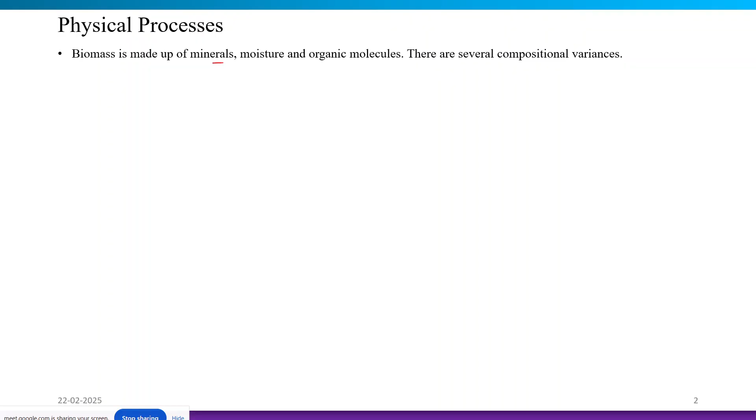So we know that biomass is made up of different kinds of minerals, moistures, and organic molecules. There are several compositional variances in the different biomass compositions. The moisture content of the terrestrial species is relatively low compared to the aquatic biomass, or you can consider the municipal biosolids and animal manures. These aquatic, municipal wastes and the animal manures have higher moisture content compared to the terrestrial biomasses.

And the woody biomass species have low ash concentrations, but certain aquatic organisms and also the agricultural crops have very high ash content. So we are discussing the moisture content and the ash content of different biomass species, because this will affect our conversion processes as well as treatment, pre-treatment processes.

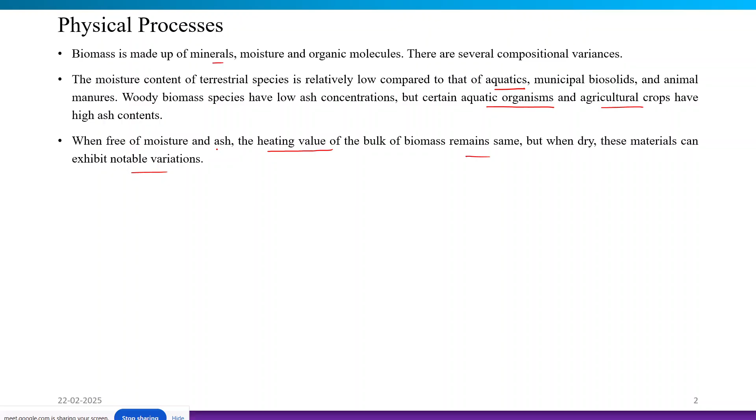So how this will impact: when free of moisture and ash, the heating value of the bulk biomass remains the same, but when it is in dry conditions, this biomass material can exhibit notable variation. That means when we decrease the moisture content and manage to decrease the ash content of the biomass, then the heating value of that biomass source as a fuel will increase.

So, when we consider the untreated municipal biosolids, they are often inappropriate for direct application in thermochemical conversion because they contain a significant quantity of moisture. Under usual circumstances, this feedstock cannot support a self-sustaining combustion process unless we do the drying or dewatering treatment to reduce the moisture content to a great extent.

Now, the physical conversion techniques are very essential for converting the raw biomass into energy-rich products in the field of biomass utilization and conversion. Two crucial processes that are frequently used to lower the moisture content of different biomass sources are, first, dewatering, followed by drying. These two treatments improve the thermal efficiency and also improve the storage stability of the biomass sources.

Thus, the enhancement of heat transmission within the biomass sources is achieved by size reduction, followed by energy densification of the biomass, such as pellet formation or briquette formation, through a compacting or densification process. Biomass processing heavily relies on separation techniques. There are different separation techniques that make it possible to isolate certain components for later use, extract important ingredients, and remove contaminants from our biomass sources.

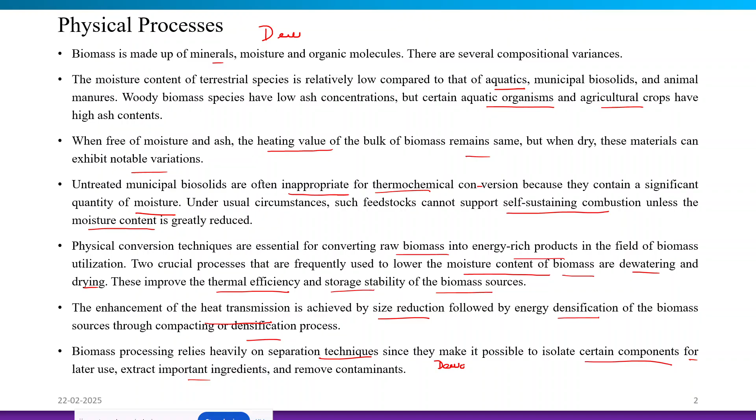So in this slide we have discussed the importance of removal of moisture and the physical processes. I'm writing here, maybe at the end. It involves dewatering, drying, size reduction, then followed by densification, and then separation. So these are the physical processes we are going to discuss in the subsequent slides.

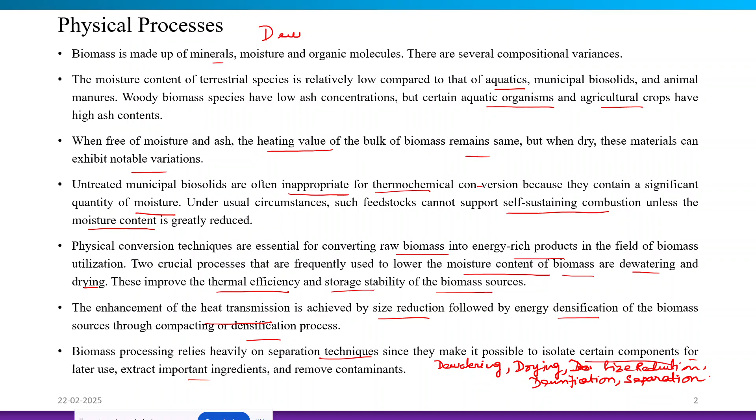First, we are going to discuss dewatering and drying. Dewatering is the process of removing completely or some of the water content from the biomass. Now we know that there are two types of water content in biomass. One is inherent water content and another one is surface water content, or the exterior water content.

Okay, so it can be essential to partly dry the raw feed material before conversion in certain situations where an unwanted material or virgin biomass is thermally treated directly for energy retrieval. Otherwise, the conversion process may use more energy than may ultimately be created in the form of energy or fuel.

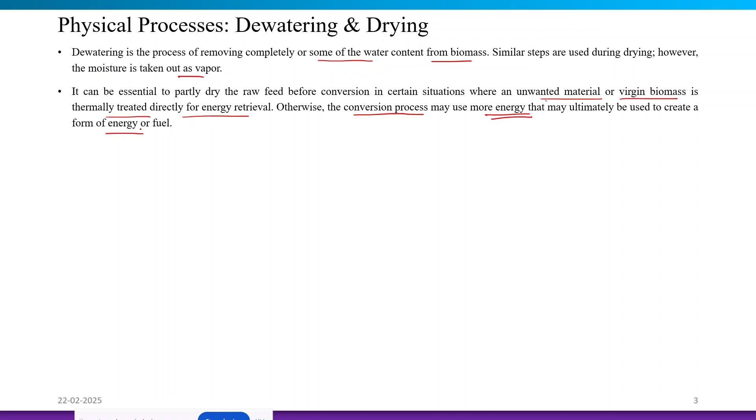The high moisture content of the biomass in its natural condition reduces the energy content and makes it difficult to manage or even to store, because if we store a high moisture biomass source in that condition, it may automatically start degrading by the presence of different organisms, right? So our storage will be damaged, the source will be damaged.

And if the moisture content is very high, then it will not be thermochemically suitable for those processes, because removing that moisture in the process of thermochemical conversion will take a lot of energy. So we are losing energy in the form of moisture removal. So it is not good practice to directly use virgin biomass in thermochemical or other conversion processes. So we are suggesting dewatering and drying treatment as a pre-treatment process of the biomass.

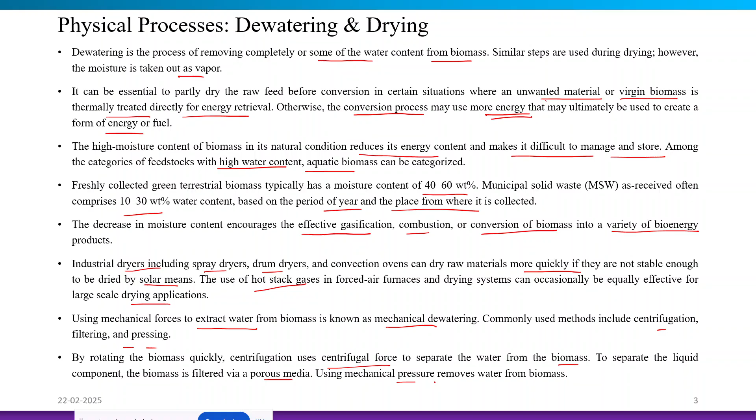Using mechanical forces to extract water from the biomass is known as mechanical dewatering. Commonly used methods include centrifugation, filtering, and pressing. These are the methods for mechanically removing water from biomass sources. By rotating the biomass quickly, centrifugation uses centrifugal force to separate the water from the biomass. To separate the liquid components, the biomass is filtered via porous media using mechanical pressure to remove the water from the biomass.

Now, thermal dewatering uses heat to help remove water from the biomass. Techniques including thermal pressing, steam explosion, and evaporation are often employed as thermal dewatering processes for biomass sources. Water is heated and turns into vapor via evaporation, which allows it to be extracted from the biomass. High pressure steam is used in the steam explosion method to break up the biomass structure, and it removes the water very easily. By subjecting the biomass to high pressure and temperature conditions, thermal pressing encourages the release of water.

Mechanical dewatering with the assistance of thermal dewatering is a relatively new method. This is the combined method of mechanical and thermal dewatering for the separation of liquids or solids in an environment friendly manner. The main concept of this combined technology is to provide high temperature in the mechanical dewatering process to improve the removal of moisture content.

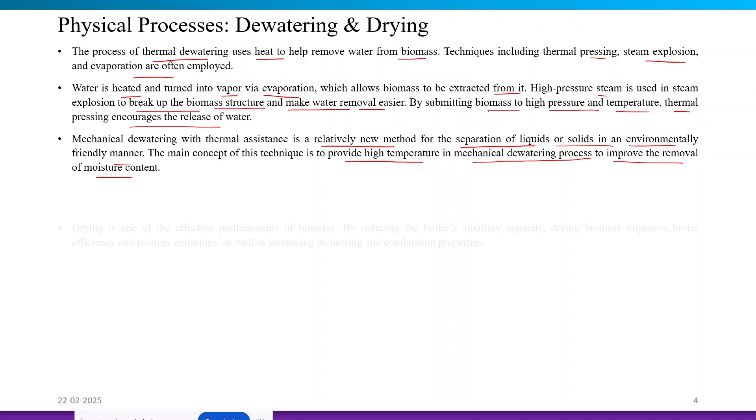After dewatering, we go for the process of drying. It is one of the effective pre-treatment processes to be considered for biomass. By reducing the boiler's auxiliary capacity, drying biomass improves boiler efficiency and reduces emissions from the boiler, as well as increasing its heating capacity and combustion properties. Biomass pre-drying could significantly reduce energy loss in the combustion process. Moreover, pre-drying results in a reduction of the required fuel flow rate for achieving the desired boiler output. Thereby, it influences fuel transportation as well as reducing the storage capacity.

We already discussed how moisture content is very crucial for the transportation and storage capacity of biomass. It is also crucial for combustion, incineration, and gasification processes, which are categorized as thermochemical processes. Also pelletization, which comes under the densification or compaction process.

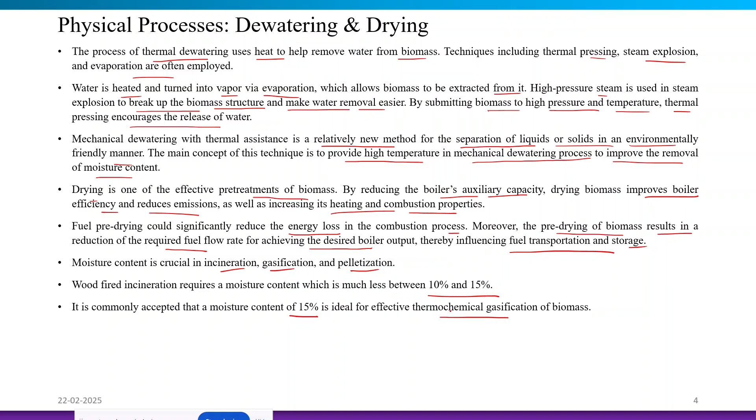Fired incineration requires a moisture content which should be less than 10 to 15%. A moisture content of 15% is well accepted and considered to be ideal for effective thermochemical gasification of different biomasses.

Now, when we talk about gasification, this is a well established technology for the thermochemical conversion of the biomass, and for this process different kinds of gasifiers are used. What kind of gasifier we should use for specific biomass sources is determined by the moisture content of the biomass. So you can see how crucial it is to determine or to reduce the moisture content of the biomass, because that will decide the types of equipment or type of reactor in the downstream processes.

Now, these biomass gasifiers are downdraft fixed bed type gasifiers, because they are mostly applicable for small sizes and produce low quantity of tar, an undesirable product. Moisture content above 20% is not applicable for this downdraft fixed bed gasifier. When we have biomass of higher moisture content, 50 to 65%, that can be applicable for updraft fixed bed gasifier or fluidized bed gasifier respectively.

So in this slide we have discussed how the moisture content is affecting the selection of the different kinds of equipment, specifically the type of gasifiers, and how it is related to the moisture content of the feed or the biomass sources.

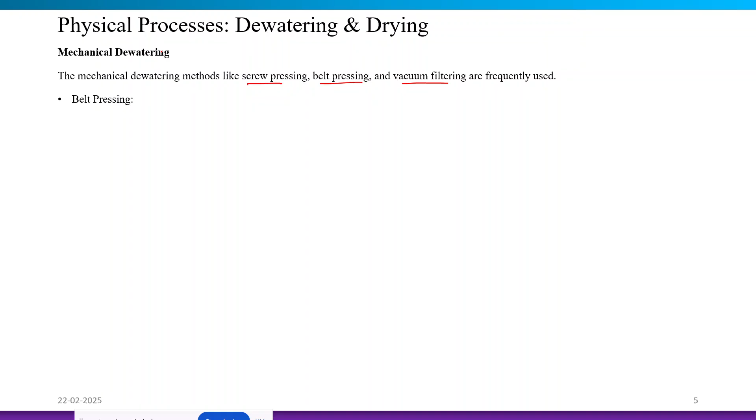Coming to the belt pressing method, belt presses are mostly used in sewage sludge dewatering. Sewage sludge is also considered to be a great source of biomass, which can be used for different fuel production.

Now, for this belt pressing, I'm giving you the schematic that you can follow. It consists of different rollers. You can see there are different rollers in the arrangement. The materials pass through one of the rollers. With the use of the rollers, the position and tension of the moving belt are maintained. Pneumatic jacks are also used to adjust the belt tension, while the belt speed is regulated by the electric motor. The belt receives the power through the rubber covered roller, and the flocculated material is removed from the inlet of the belt press.

Now you can see in the schematic that this is the sludge feeding, this brown color, and it is coming slowly over the belt. When it is going over the rubber covered roller, this is the pre-dewatering zone, and in the process dewatering is happening. This blue color you are seeing is the water being collected from the sludge over the process, and in between there is some external water supply as a belt washing system.

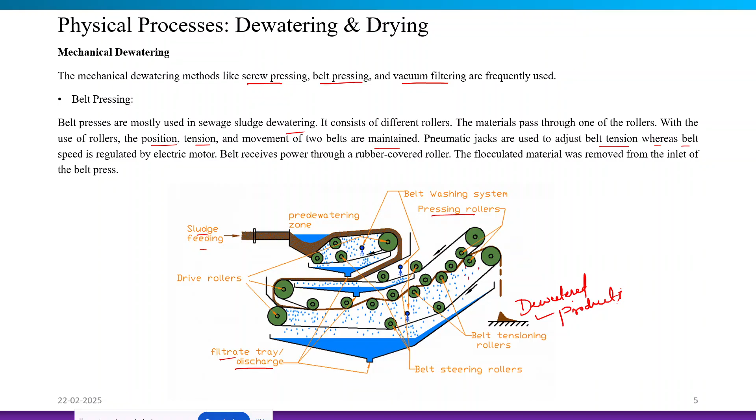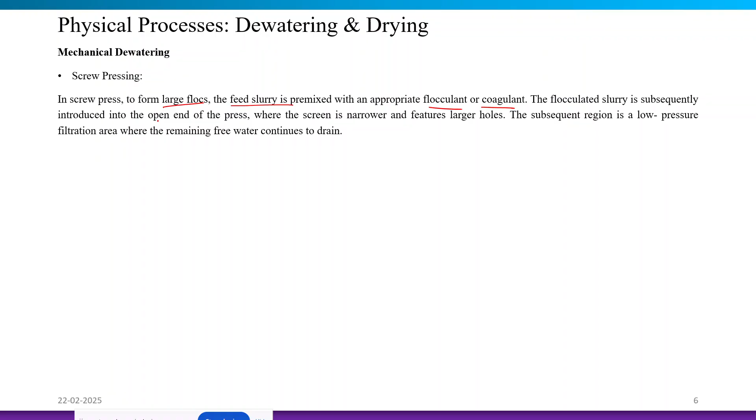Next one is the screw pressing. In the screw press, to form large flocs, the feed slurry is premixed with some appropriate flocculant, or you can say coagulant. The flocculated slurry is subsequently introduced into the open end of the press.

The final section is the squeezing area, where both the free water and interstitial water, inherent water, is drained out. At the discharge end, a conical pressure mechanism restricts the removal of the filter cake by exerting a back pressure that enhances the filtration process of the cake.

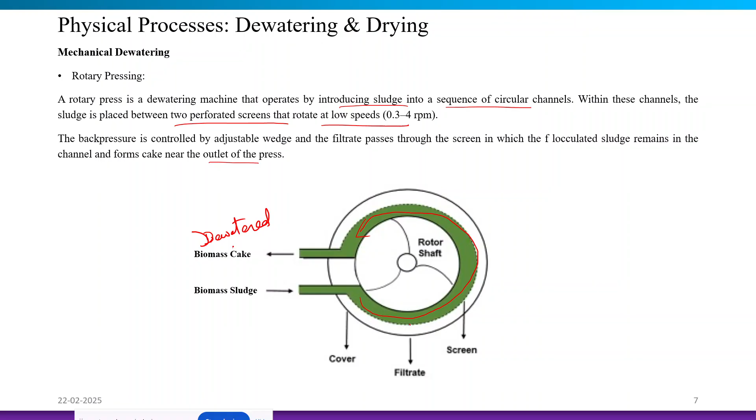Next, we are going to discuss thermal dewatering processes. By the name you can think that in the thermal dewatering process we are utilizing heat to remove the water from the biomass. This technique works especially well with biomass that contains a lot of moisture, including sludge and waste material which are in wet condition.

Thermal dewatering may be accomplished through procedures including evaporation, thermal drying, and flash drying. Heat is applied to the biomass during evaporation, which causes the water to vaporize. This procedure may be energy intensive, and it calls for precise temperature control so that our biomass sources are not damaged. Only the water should be removed from the feed;

we should avoid any thermal damage of the biomass sources. Thermal drying is the process of removing moisture from the biomass using hot air or other heated gas, which should not be reactive with the biomass, so we should consider that. Dewatered material is produced when the moisture in the biomass evaporates and is removed by the drying medium. Here the drying medium is the hot air.

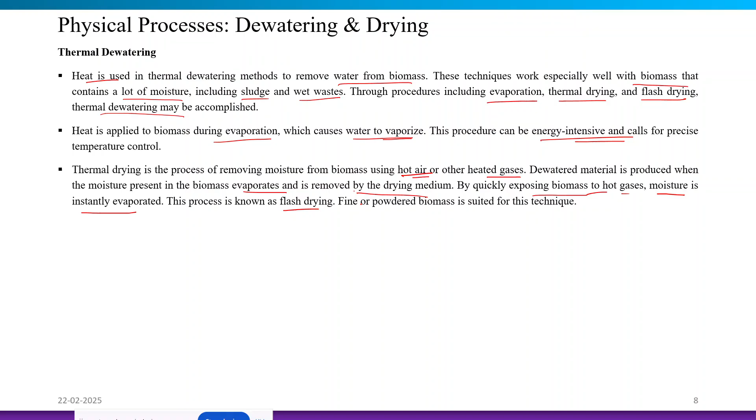By quickly exposing the biomass to hot gases, the moisture is instantly evaporated. This process is known as flash drying. Fine and powdered biomass is well suited for the technique because it has a high surface area, so the drying will be faster, because it is an instant process.

Coming to the chemical dewatering process, utilizing different chemicals to improve water separation from the biomass is a key component of the chemical dewatering technique. Flocculation, coagulation, and settling are frequently used as part of chemical dewatering.

Chemicals are added during flocculation and coagulation in order to encourage the aggregation of different suspended particles in the biomass sludge feed, which aids the quick settling of those undesirable suspended particles. These substances, referred to as flocculants or coagulants, induce small particles to aggregate into bigger flocs that are much simpler to separate from the water.

When the biomass is left to stand, solids may be attracted to the bottom by gravity. In this settling method, these flocs are attracted to the bottom of the chamber by gravity, and this process is known as settling. So chemical additives can improve particle agglomeration, and thus enhance the settling process.

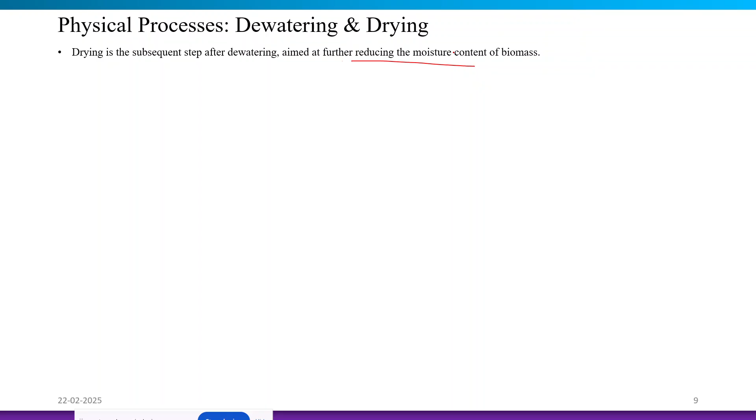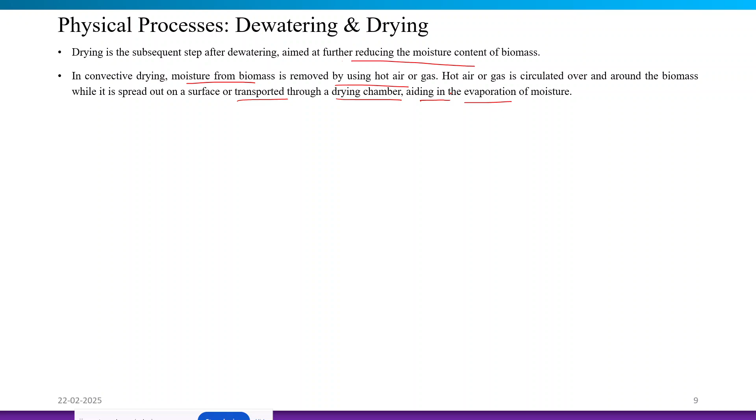Next, we will discuss drying. Drying, which is a subsequent step after dewatering, has the aim to further reduce the moisture content of the biomass. In convective drying, the moisture from the biomass is removed by hot air or gas, any kind of hot gases. It is circulated around the biomass while it is spread out on a surface or transported through the drying chamber. It has the aim to evaporate only the moisture content of the biomass. It has nothing to do with any damage of the biomass sources. Only moisture removal is happening.

In the case of contact drying, direct contact is maintained between the biomass and the heated surface in the aim to remove the moisture. In order to facilitate the direct drying condition, effective heat transfer and moisture evaporation, the biomass is often put on a heated drum or belt. For biomass having high moisture content or susceptible to breakdown at higher temperature, contact drying is frequently utilized. Means those biomass sources which are very sensitive to higher temperature, which have the tendency to be damaged at higher temperature. So for those cases, contact drying is suggested.

In microwave drying, the heat is produced inside the biomass through electromagnetic waves, which causes the moisture to evaporate very quickly. Drying is happening in the microwave drying system. These methods have benefits including faster drying and homogeneous heating.

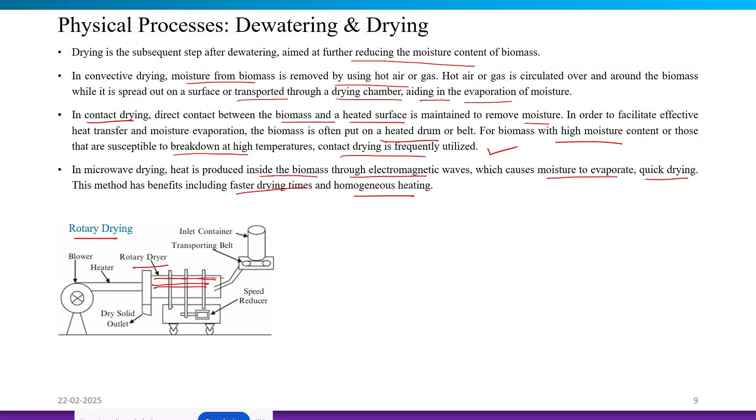The indirectly heated rotary drum uses a steam source or hot air which flows through the outer wall of the dryer or through the central shaft of the dryer, and thus heat is being transported in the form of conduction. So here, with the blower, in the heated condition, the hot air passes through the outer wall or through the center shaft. So that's why it is rotating and it is helping to dry out the moisture content of the biomass.

Next one is another kind, which is the flash drying process. It is also known as the pneumatic drying system. The material is introduced into the high speed stream of hot air with the help of a screw conveyor. So the small particles traverse through the long metal tube and the dried product is extracted from the air stream with the help of cyclones and a bag filter.

Now we have discussed a lot about dewatering and drying systems and the involved equipment for dewatering and drying. Next, we are moving forward with the discussion of size reduction as a physical pretreatment process. In size reduction, we are going to discuss the hammer mill, knife mill, disc and drum chippers, which are commonly used for biomass size reduction.

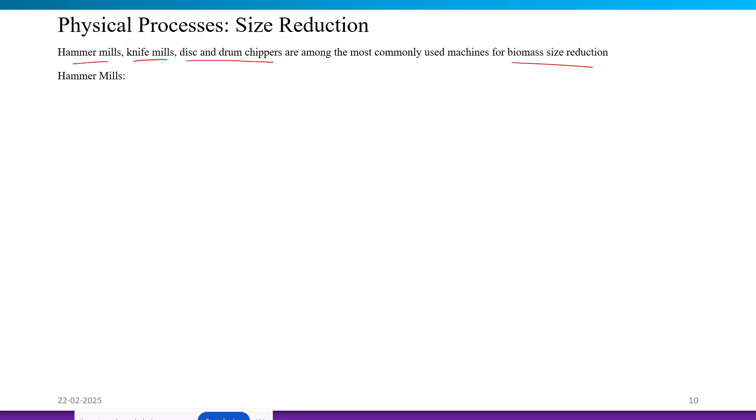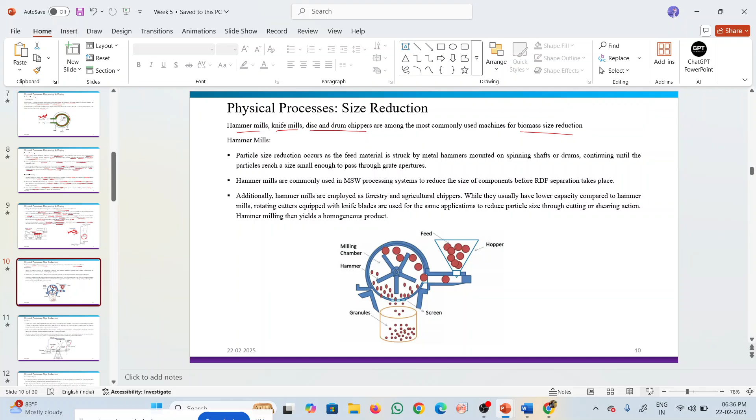So, this is the schematic of the hammer mill. Here, particle size reduction occurs as the feed material is struck by the metal hammers. These are the hammers mounted on the spinning shaft or drum. It is continuously hammering those bigger particles until it reduces their size, and then they pass through the grate aperture. Hammer mills are commonly used in MSW, or municipal solid waste, processing systems to reduce the size of the components before RDF separation takes place. RDF is nothing but refuse derived fuel.

Additionally, hammer mills employed as forestry and agricultural chippers. While they usually have lower capacity compared to hammer mills, rotating cutters equipped with knife blades are used to reduce the particle size through cutting and shearing action. So here the hammer mill produces a homogeneous product.

So this is the hopper and feed is being introduced. The larger feed material or particles are crushed by the continuous hammering process, and when size reduction has happened to the maximum extent possible by the hammer mill, the smaller particles pass through the opening at the bottom and are collected from the bottom of the hammer mill.

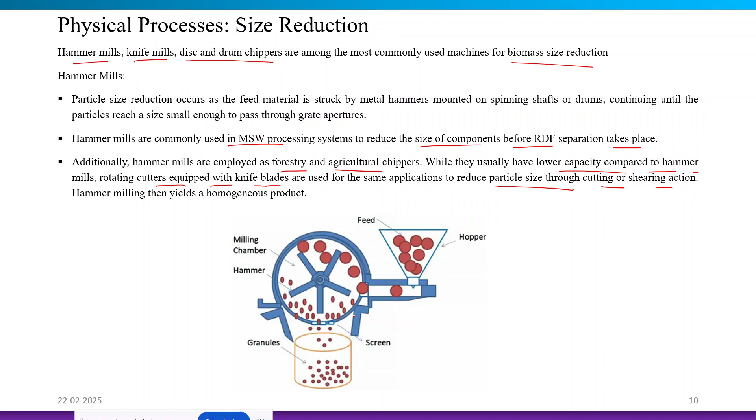Next one is the knife mill. In the knife mill, the rotating shafts are fitted with sharp edged knives alongside some stationary shear bars. Lignocellulosic biomass undergoes grinding in the knife mill through the continuous cutting action of the knives and the shear presence of the shear bars.

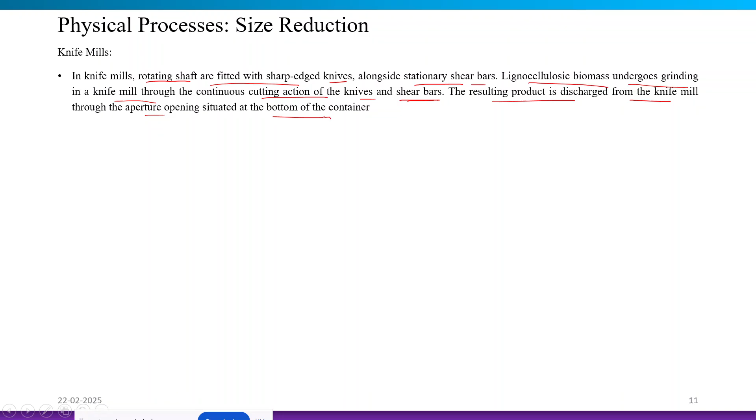The resulting product is discharged from the knife mill through the aperture opening situated at the bottom of the container, similar to the hammer mill design.

Knife mills are preferred due to their favorable characteristics, including low power consumption, enhanced particle flowability, and narrower particle size distribution. It also supports moisture content of the biomass feed up to 15%.

This knife mill process involves the use of stationary and rotating knives to grind the biomass. Compared to the hammer mill, the knife mill produces finer biomass size reduction. Many factors influence the milling action, such as number of knives, milling speed, particle size requirement, gap between the knives, and the angle at which the knives are placed.

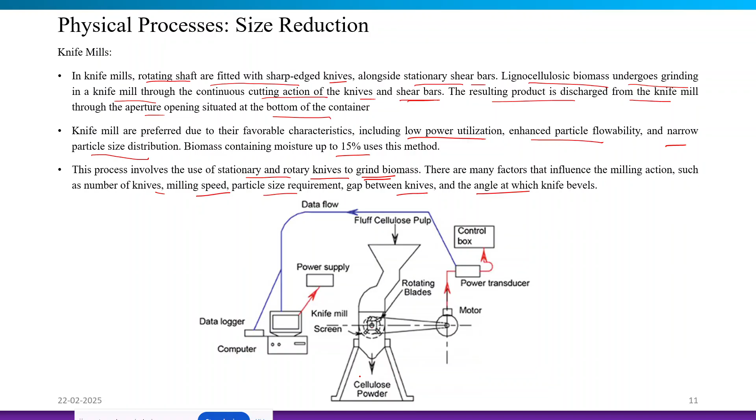So here it is the knife mill. On the rotating shaft, some knives are placed, in a similar kind of design to the hammer mill, but here the grinding happens to a greater extent and we get a powder product.

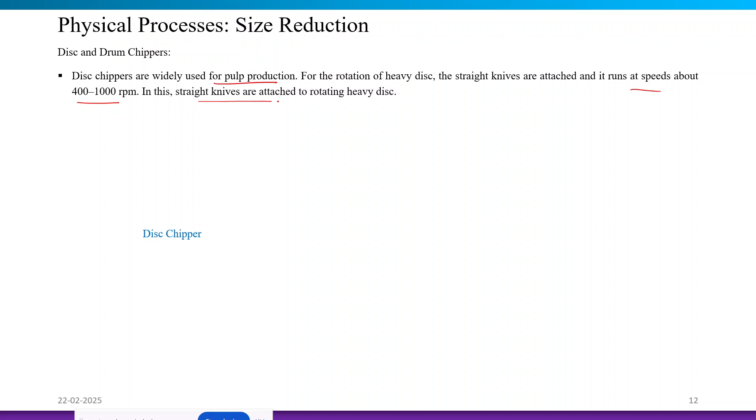Next one is the disc or drum chipper. Disc chippers are widely used for the pulp production industry. For rotation of heavy discs, the straight knives are attached, and it runs at a speed of about 400 to 1000 rpm. The straight knives are attached to the rotating heavy discs.

Drum chipper: we discussed about the disc chipper. Drum chipper consists of a steel cylinder with 12 or more knives arranged in tangential alignment. The processing knives must be replaced every 50 to 100 tons of operation, and every 200 to 300 tons. The main chipper unit consists of the feeding unit, chipping unit, and output unit. Those are very common systems.

Now the drum chipper produces more similar chips than the disc chipper, so the variation in the output is much less compared to the output of the disc chipper.

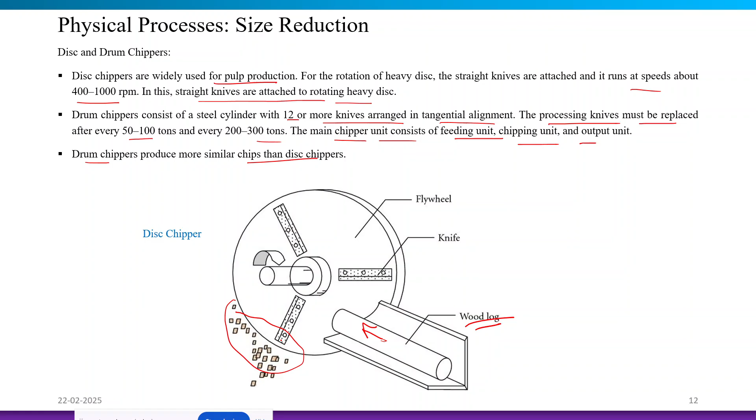This is the schematic of the disc chipper. You can see these straight knives attached to the rotating shaft, and this will reduce the size of the input biomass. Here a wood log is introduced into the disc chipper and it gets crushed by the disc chipper. These are the size reduction equipment processes, and they are widely used.

Now coming to the next part, that is the densification process. The use of biomass directly for cooking or heating purposes is responsible for air pollution and produces a very bad impact on living organisms and the environment. To avoid this problem, agricultural waste or residue can be converted into solid biomass fuel using the technology of briquetting or pellets.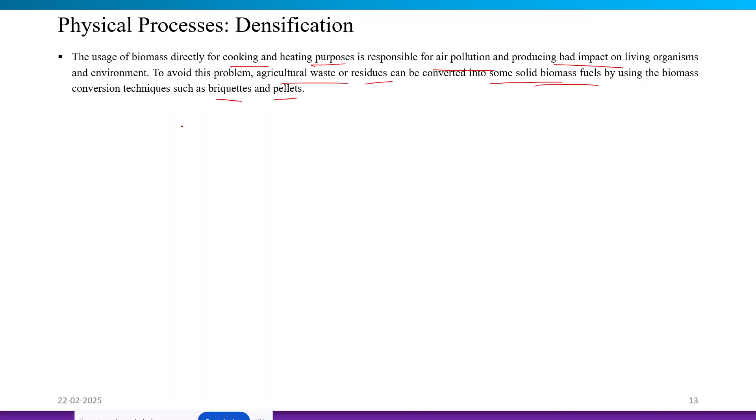This is what is named the densification process. The densification or briquetting technology plays a key role in minimizing the problem of high storage capacity and enabling easy transportation. Briquettes or pellets are the best solution for utilizing raw agricultural waste as a form of solid biomass fuel. Now, how is this preparation of densified biomass fuel done?

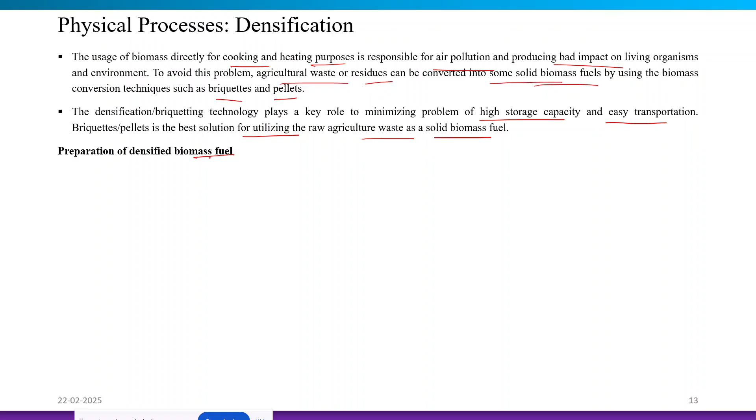The dried material is mixed with different binders, properly mixed, and then formed into biomass pellets or briquettes using machines. Once the solid fuel is formed, it is cooled and called a biomass solid fuel.

The various processes to prepare the biomass residue for compaction are drying, size reduction, and mixing of different biomass residues in a suitable ratio, along with mixing of the binder in a suitable ratio for preparing these pellets.

There are various types of binders used to improve the quality of the briquettes, such as biosolids, cassava, corn, gelatin, microalgae, and molasses. Molasses is highly used because it is easily available from the sugar industry, and it can be utilized for the densification of the biomass.

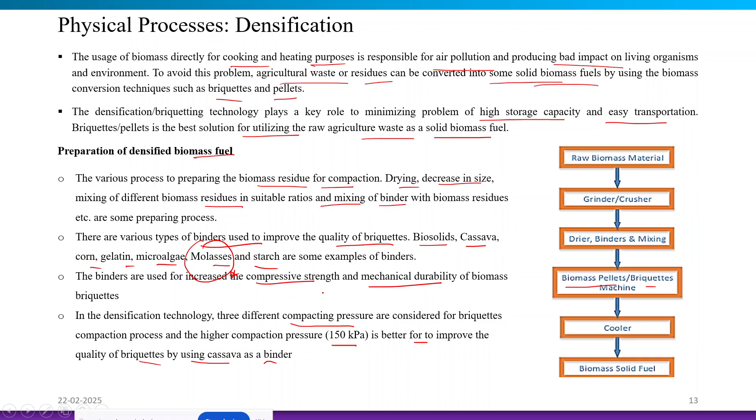What are the densification equipments used for densification? The first one is the screw compaction or extruder machine. The screw extruder has a rotating screw which exerts a force on the biomass residue coming from the feedstock for compression.

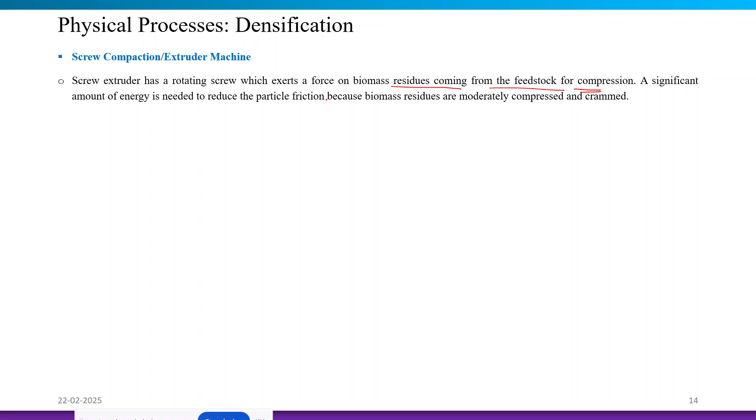A significant amount of energy is required to reduce particle friction because the biomass residues are moderately compressed and cramped here. At a high initial temperature, the particles of the biomass squander their elasticity property and become softer, which causes interlinking of the particles and forms local bonding.

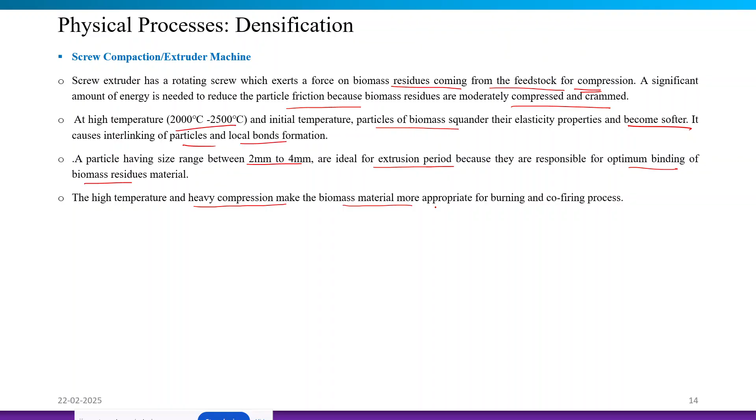A particle size range of 2 mm to 4 mm is ideal for the extrusion period because it is responsible for optimum binding of the biomass residue material. This high temperature and heavy compression makes the biomass material more appropriate for burning and co-firing processes.

This is the extruder machine, with similar screws arranged here. From the hopper, the biomass is fed, and there are heaters present, so throughout the process it is being heated at a high temperature.

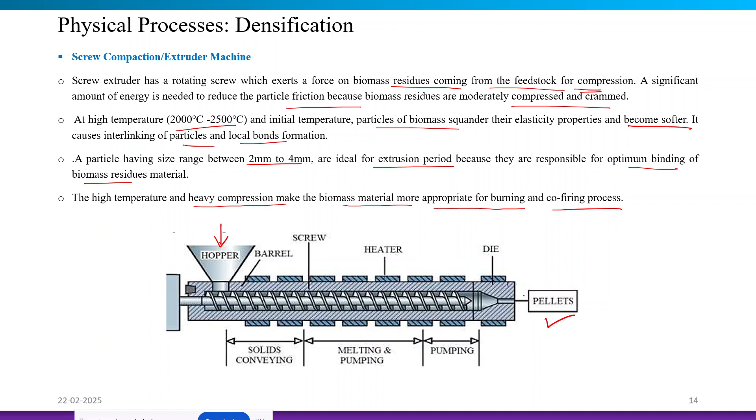This temperature is maintained, and when the biomass is initially introduced into the screw compaction machine, it first gets transported to the high melting zone. Here melting happens, and then interlinking of the particles or local bonds are formed, and these pellets are collected from the outlet of the screw compaction machine.

The next one is the piston press machine for densification. It uses different pistons driven by a flywheel or hydraulic mechanism for the production of densified biomass fuel.

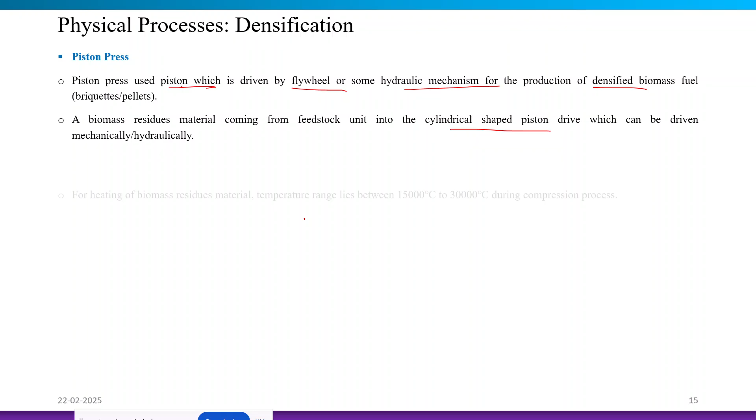Biomass residue material coming from the feedstock unit into the cylindrical shaped piston drive can be driven mechanically or hydraulically. For heating the biomass residue material, the temperature maintained here is 15,000 to 30,000 during the compression method, so it is a high temperature operation.

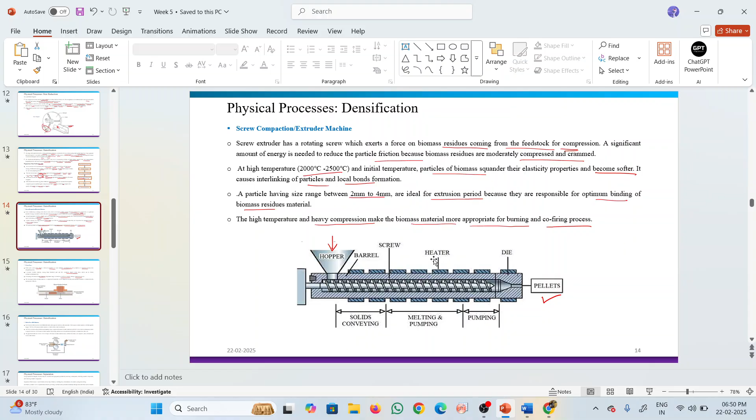Madam, please check that temperature range again, I have some doubt about it. Is it 15,000 degrees centigrade and 30,000 degrees centigrade? In the previous slides you showed 2000 to 2500 degrees centigrade. We are dealing with biomass, and I don't think we'd use this much temperature even for metals. To be frank, I'm not at all agreeable with the 15,000 and 30,000 figures.

I will check this, as I took this information from a journal, so I will verify the temperature again. When I upload the slide, if it needs to be corrected, I will upload the updated temperature range. Thank you for mentioning it, I will check with that.

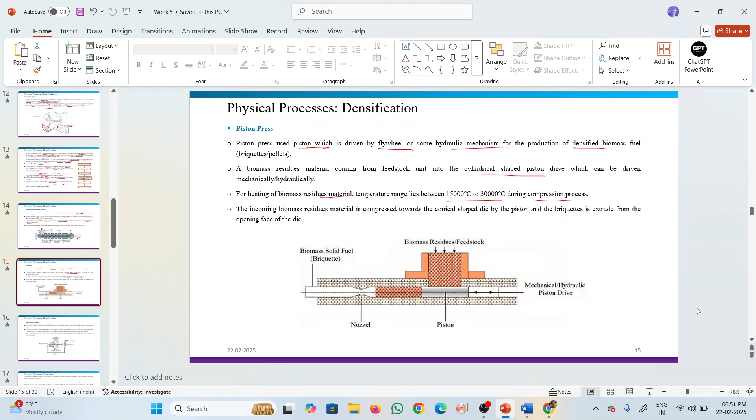This is the picture for the piston press arrangement. The biomass residue or feedstock is fed into the hydraulically driven pistons, and the biomass solid fuel is densified here, getting compacted over the process, and we get the briquettes out as the product at this end.

It is also maintaining the temperature here, but I need to cross check this temperature again.

So in this high temperature zone, the material is being compressed, and we are getting a solid fuel or briquette out of the piston press machine.

The next one is the roller press, where two rollers rotate in opposite directions of each other. The biomass residue material is fed through the hopper, and the flow of the material is controlled by the control mechanism.

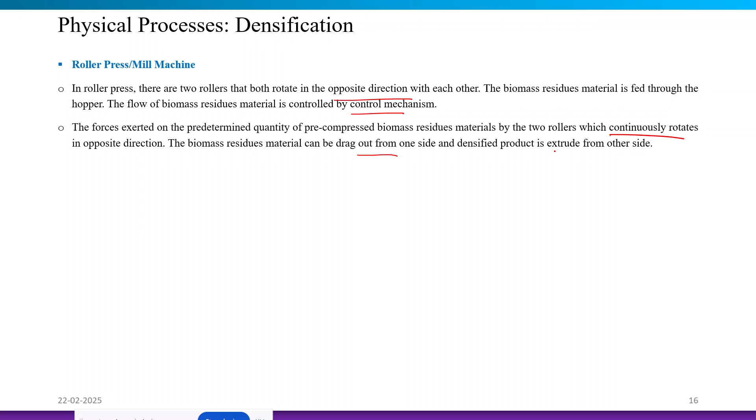Forces are now exerted on the predetermined quantity of pre-compressed biomass residue material by the two rollers, which continuously rotate in opposite directions. The material is dragged from one side, and the densified product is extruded from the other side. The gap between the two rollers depends on the type of biomass residue used, as well as the moisture content, particle size, and the ratio of binders and other factors.

This is the two roller arrangement, rotating in opposite directions. If it is rotating in one direction, the other roller will rotate in the opposite direction.

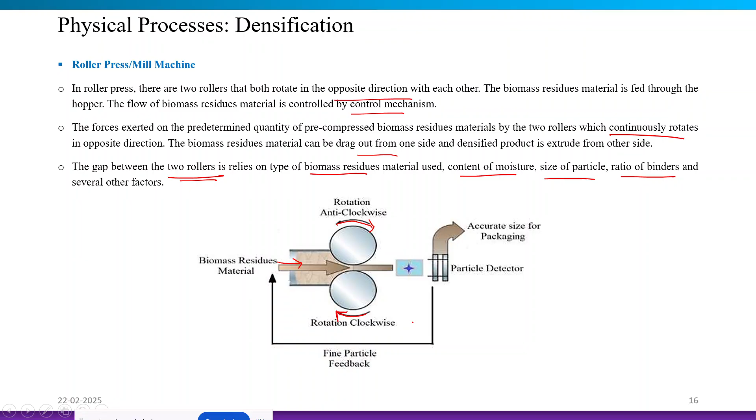The biomass residue material is fed from this end, and by this compaction method, we get the dried and compacted product out of the roller press mechanism. Some of the fine particles produced are not the desired product, and these can be circulated back to the feedstock.

Next, we discuss separation, which is the last part of the physical process considered. Using separation techniques, biomass can be converted into high quality products by removing contaminants and extracting valuable components.

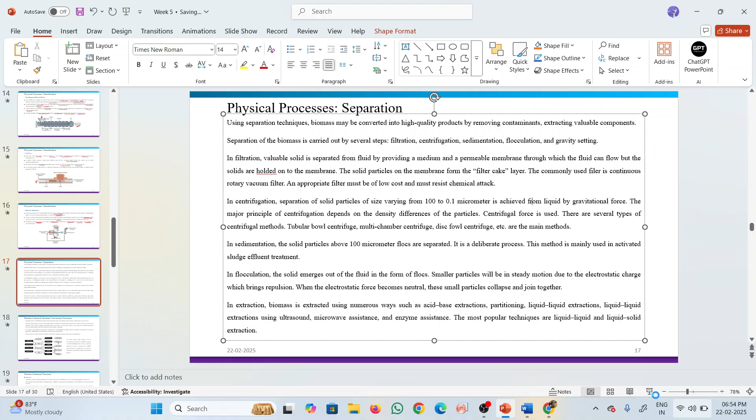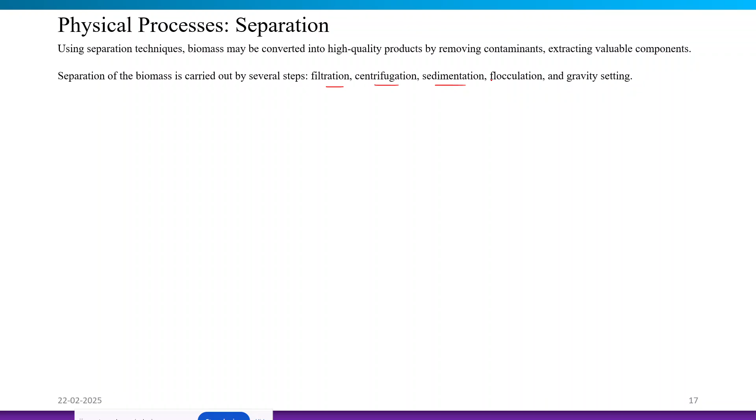This separation of biomass is carried out in several steps: filtration, centrifugation, sedimentation, flocculation, and gravity settling.

In the filtration method, the valuable solid is separated from the fluid by providing a permeable membrane through which the fluid can flow, while the solids are held onto the membrane. The collected solid particles on the membrane form a filter cake layer, and these are commonly used.

Continuous rotating filters are commonly used for this filtration process. An appropriate filter must be of low cost and must resist chemical attack. We should keep in mind that it should resist chemical attacks. The commonly used equipment for this filtration process is the rotary vacuum filter.

Next is the centrifugation process, where separation of solid particles happens. Solid particles ranging in size from 100 to 0.1 micrometers are separated from liquid using gravitational force.

The major principle here is that centrifugation happens due to density differences of the particles. Centrifugal force is applied, and because of these density differences, the fine product and the larger coarser product are separated.

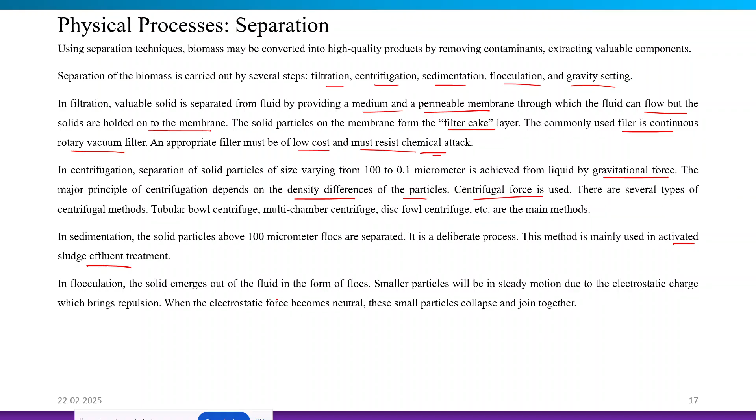In flocculation, as we discussed a few slides back, we use different kinds of flocculants or coagulants to form flocks. Smaller particles remain in steady motion due to electrostatic charge which causes repulsion. When the electrostatic force becomes neutral, these smaller particles collapse and form flocks, which then settle down.

In the extraction process, which is very important, biomass is extracted using different methods like acid-base extraction, partitioning, or liquid-liquid extraction, with the assistance of ultrasound extraction, microwave extraction, or enzyme-assisted extraction methods. There are many varieties, but the most popular techniques are liquid-liquid and liquid-solid extraction for biomass separation.

So we have discussed the first part of this session, the physical processes. Now we are moving towards the discussion of thermochemical biomass conversion processes.

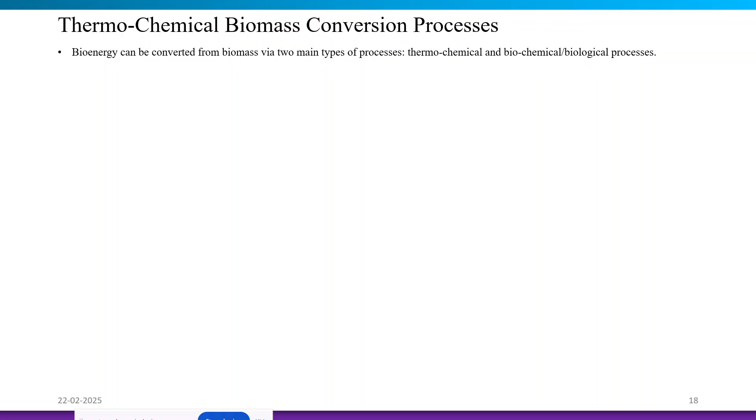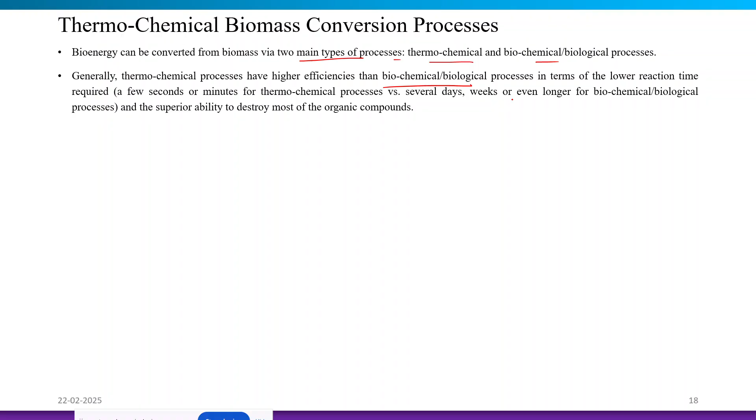So here we know that biomass bioenergy can be converted from the biomass via two main types of processes. One is thermochemical process, another one is the biochemical or biological processes. Generally, thermochemical processes have higher efficiency than the biological or biochemical processes in terms of the lower reaction time, because few seconds or few minutes are utilized in the thermochemical processes, whereas the biological processes take several days or weeks, even longer than that.

And also the quality of the product out of the conversion is superior in the thermochemical processes than the biological processes. For example, when we consider the lignin, these lignin materials are typically considered to be non-fermentable, right? We discussed in the last class how it is recalcitrant in nature, so it is not typically considered to be fermentable. Thus, it cannot be completely decomposed via biological means, whereas it can easily be decomposed by thermochemical approaches.

Now, the thermochemical conversion processes mainly include direct combustion, pyrolysis, gasification, and direct liquefaction or hydrothermal liquefaction processes. So in this diagram, you can see that these are the four main thermochemical processes, and from the pyrolysis, we get the solid product as well as liquid and gaseous product. Whereas in the liquefaction process, we mainly get the liquid or oil kind of fuel production at a higher yield. From the gasification, we get mostly fuel gases,

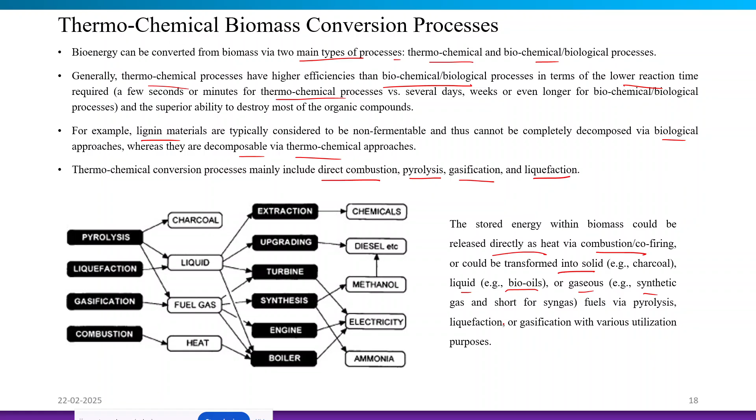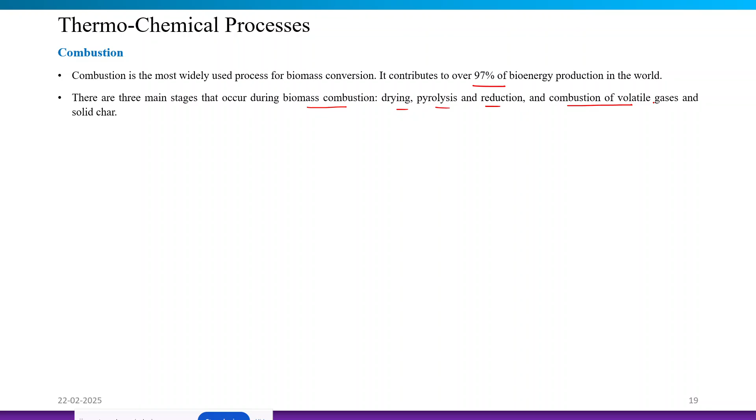So, coming to the first thermochemical conversion process, that is the combustion. It is the most widely used process for biomass conversion, and it contributes over 97% of the bioenergy production in the world. There are three main stages that occur during biomass combustion. First one is drying, pyrolysis and reduction of the biomass sources, and then combustion of the volatile gas generated in the pyrolysis step, and then it produces the solid char.

The combustion of the volatile gas contributes to more than 70% of the overall heat generation. It takes place above the fuel bed and is generally evident by the presence of the yellow flame. When the combustion of the volatile gas is occurring, you can get to know about it by seeing the color of the flame, that is yellow in nature. Char is combusted in the fuel bed itself, and it is noted by the presence of some blue flames.

The combustion of biomass on a large scale is still considered to be a complex process with various technical challenges associated with the biomass fuel characteristics, the type of combustor you are using, and various challenges when co-firing with existing conventional sources like coal or natural gas. In comparison to fossil fuels, biomass fuels have relatively lower heating value because they have high moisture content and high oxygen content.

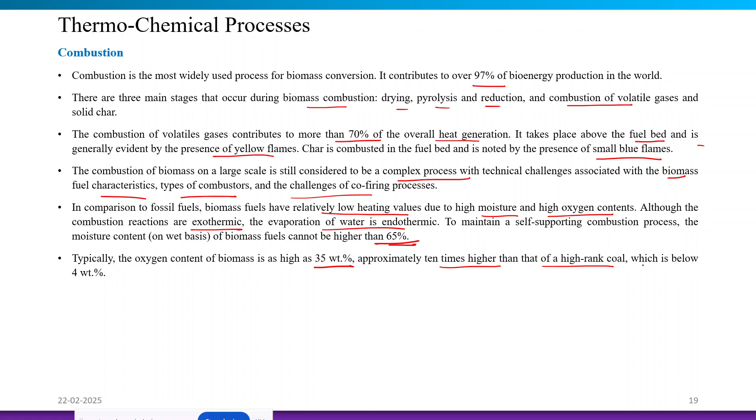Although the combustion reaction is exothermic in nature, the evaporation of the water is endothermic. So, to maintain a self-supporting combustion process, the moisture content of the biomass fuels should not be higher than 65%, because overall the reaction should be exothermic. So we need to decrease the water content of the biomass fuel being fed into the combustor. Typically the oxygen content of biomass is as high as 35 weight percent, which is 10 times higher than high rank coal, which has oxygen content below 4 weight percent.

Other challenges include fouling and corrosion of the combustor. This fouling and corrosion are considered detrimental because they reduce heat transfer in the combustor. Fouling is commonly associated with alkali metals and other elements like silicon, sulfur, chlorine, calcium, and iron present in the biomass ash. In the first slide itself, we discussed how the ash and moisture content affect the thermochemical conversion processes, how moisture content affects it and how we can do the pre-treatment.

So here we have discussed the role of the biomass ash, generated because of the different alkali metals and elements present in the biomass. They negatively affect the chemical reactions, because through a series of chemical reactions they form deposits in the form of chlorides, silicates and sulfates on the wall of the combustor, and they reduce the heat transfer.

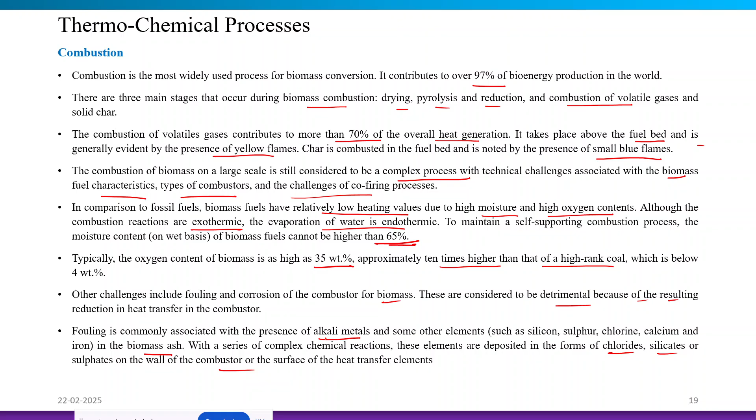So we use fixed bed, fluidized bed, and entrained flow reactors. These are typically the three mainly used combustion systems. By increasing the carrier gas velocity within the reactor, we optimize the thermochemical processes. A higher gas velocity translates to intensive mixing of the feedstock, which enhances the combustion efficiency and also enhances the heat exchange rate. Hence, the entrained flow system, out of these three, would be expected to exhibit the best performance as a combustion system.

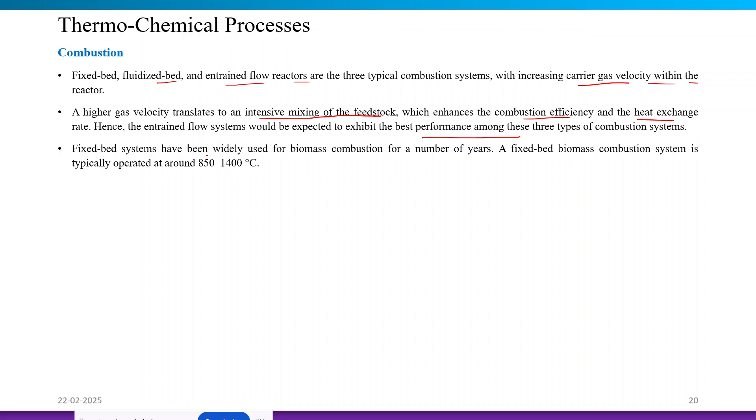Now, the fixed bed system has been widely used for biomass combustion for years, and a fixed bed biomass combustion system is typically operated around 850 to 1400 degrees Celsius. Generally, as soon as new biomass feed is added into the fixed bed furnace, it gets pyrolyzed, and it forms volatile gases and also solid chars. The combustion of the char and those volatile gases is maintained by the primary and secondary air circulation under and above the grate. Because of the high volatile matter content of different biomass fuels, a greater secondary air supply is always required than the primary air supply.

Now, compared to the fixed bed system, the fluidized bed system has higher combustion efficiency, and it is reported to be more suitable for large scale operation. Fluidized bed systems employ silica sand, limestone, dolomite, and other non-combustible materials as the bed material. The typical operating temperature is 700 to 1000 degrees for the fluidized bed, which is comparatively lower than the fixed bed system. In the fluidized bed combustor, the biomass is intermixed with the moving medium, and it gives high combustion efficiency. So depending on the blowing air velocity, fluidized bed systems can be further divided into bubbling fluidized bed systems or circulating fluidized bed systems.

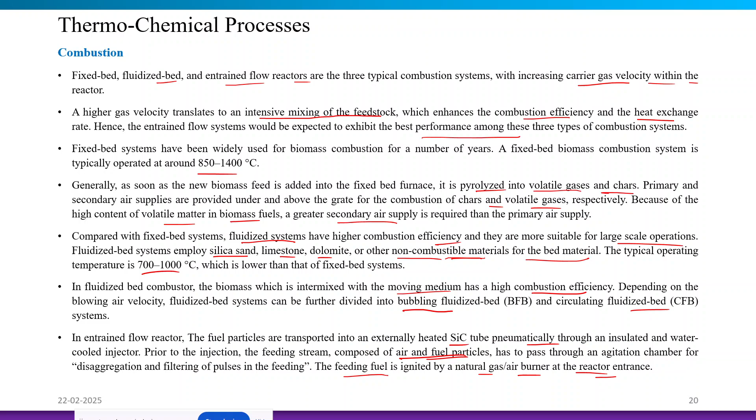So, the different kinds of equipment design and how they are operated for combustion will be discussed maybe in some later classes, but not today. We are mainly focusing on the processes, the fundamentals and process operating conditions in today's session.

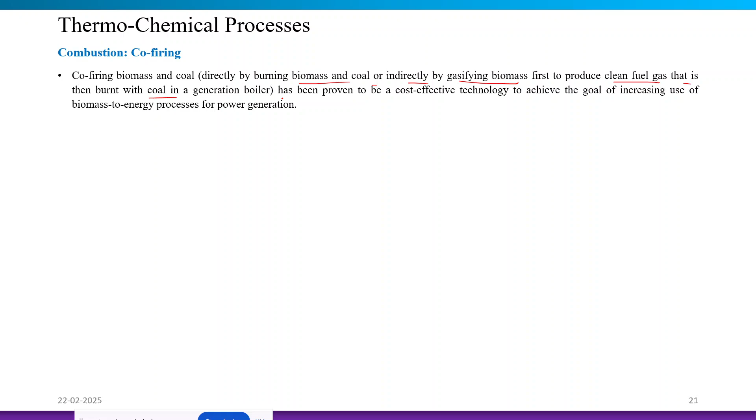So now coming to one important factor, that is co-firing as a part of combustion. Co-firing biomass and coal is done directly, by burning biomass and coal, or indirectly, by gasifying the biomass first to produce some clean fuel, which is then burnt in the presence of the coal. There are two options. Co-firing biomass and coal is proven to be a cost-effective technology to achieve the goal of increasing use of biomass to energy processes for power generation. In comparison with other thermochemical processes for biomass utilization and bioenergy production, co-firing becomes a promising and cost-effective method, because with only a few modifications, existing coal-based power plants can be upgraded and utilized.

Various types of biomass, such as woody biomass, herbaceous material, agricultural residues, and energy crops, can be easily co-fired with different types of coal, in percentage fractions as high as 15%. Biomass co-firing with coal could reduce the occurrence of the fouling that I discussed a few slides back, and the corrosion problem, when compared to the case where only biomass is used. Due to the dilution and consumption of different alkali metals via interaction with the sulfur or silica present in the coal, the dilution occurs, so the fouling and corrosion problems are reduced.

In addition to coal, biomass can also be co-fired with natural gas. So here the co-firing of natural gas with the clean fuel gas derived from low heating value biomass material can be another promising option for bioenergy utilization.

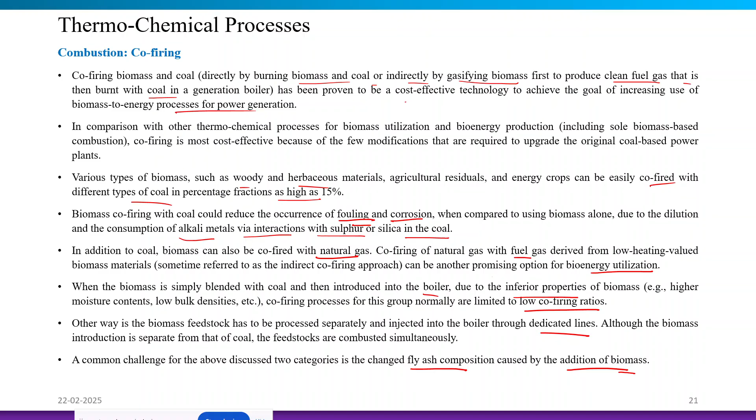Next process of the thermochemical processes is pyrolysis. This is a very important process. It is considered to be industrially applicable at industrial scale. It is the thermal decomposition process that takes place in the absence of oxygen to convert the biomass into solid charcoal, liquid bio oil and gases at elevated temperature.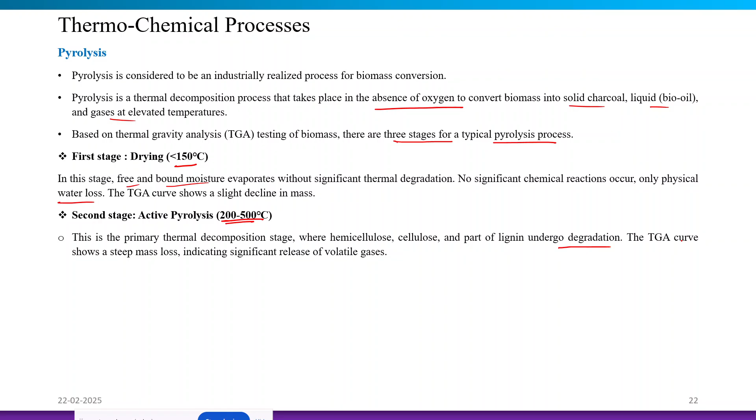The second stage is active pyrolysis. It covers 200 to 500 degrees Celsius and it primarily consists of the thermal decomposition stage, where hemicellulose, cellulose and lignin undergo degradation in different temperature regions. The TGA curve shows steep mass loss, indicating the significant release of volatile gases.

So from the TGA DTG curve, the DTG curve typically exhibits two or more peaks. A peak at nearly 200 to 300 degrees Celsius denotes hemicellulose degradation. 300 to 400 is cellulose degradation, and after that there is a broader degradation range for the lignin. The major pyrolysis products in active pyrolysis are bio oil and gases, carbon monoxide, carbon dioxide, methane and hydrogen, as well as biochar.

And the last stage, the residue stage, happens around 800 to 900 degrees Celsius, where very little change in mass is observed. It indicates the final residue left, mainly the ash and unconverted carbon. The final mass represents the inorganic content of the biomass sources, which is mineral, metal, and other non-volatile compounds.

So this is the TGA DTG curve for lignocellulosic biomass. You can see this dotted line is the DTG curve, which denotes the percentage decomposition per minute. It refers to the rate of decomposition. Here you can see at 200 to 300 there is a peak; it represents the hemicellulose. For the black one, it is 300 to 400, it represents the lignin, and lignin still gets decomposed over the wide range after that. And the cellulose is happening at 300 to 400 in this region.

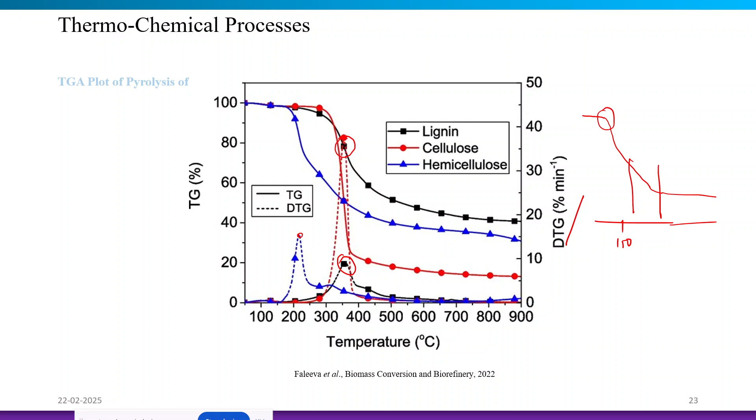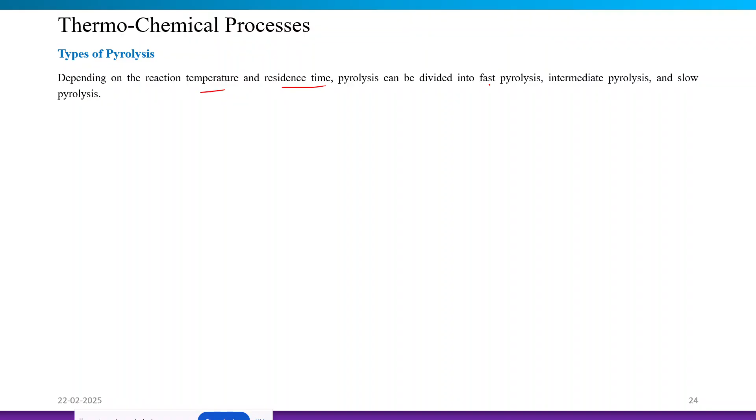So when we talked about the active pyrolysis, which is in the range of suppose 200 to 500 degrees Celsius, there are some types of pyrolysis depending on the reaction temperature and the residence time. This is divided into fast pyrolysis, intermediate pyrolysis, and slow pyrolysis. Fast pyrolysis has a moderate temperature around 500 degrees and a short vapor residence time around 1 second.

The product of fast pyrolysis is mostly the liquid product. Most contribution is liquid product, and there are other products of char, solid, and gas. In intermediate pyrolysis, a moderate temperature, less than 500, is maintained, and the vapor residence time is maintained around 10 to 20 seconds, where the liquid product or bio-oil production is also highest, with other contributions of char and gaseous product.

Whereas slow pyrolysis, also known as the carbonization process, maintains a low temperature around 400 degrees and a very long residence time. For that we get a high contribution of char and gaseous product, and liquid product is produced at a lower content. So several factors need to be considered to maximize the liquid yield in a fast pyrolysis process.

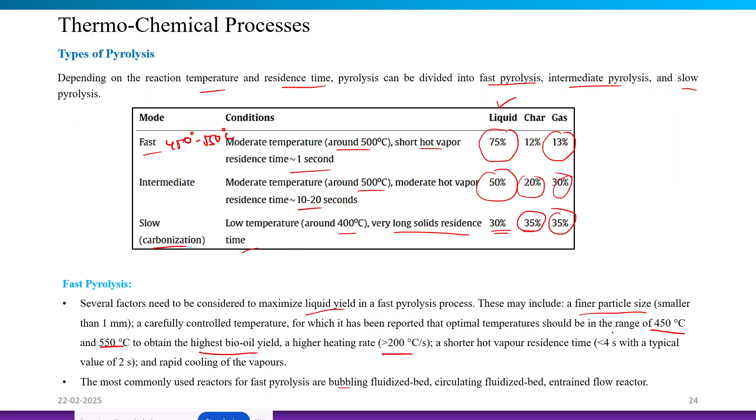The most commonly used reactors for fast pyrolysis are the bubbling fluidized bed, circulating fluidized bed, and entrained flow reactor. In addition to bio-oil production, it is also reported that we get a lot of hydrogen gas at higher temperatures of 700 to 1000 degrees Celsius. Two types of reactions are mainly responsible for converting methane, C2 to C5 hydrocarbon vapors, and simple aromatics into hydrogen.

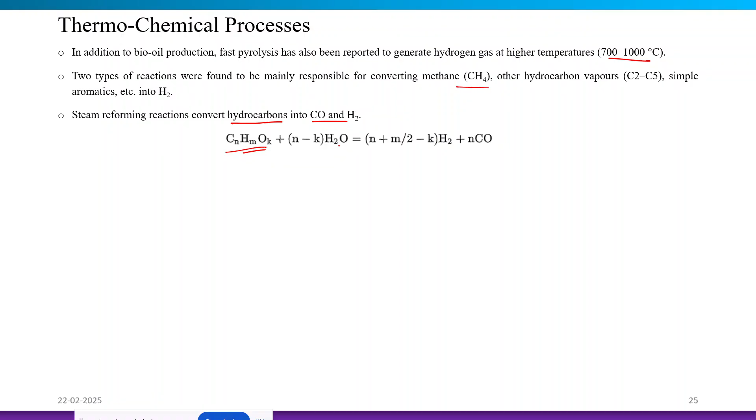The first one is the steam reforming reaction, which converts the hydrocarbons into carbon monoxide and hydrogen. You can see this is the common hydrocarbon structure, and with the presence of steam, we get hydrogen and carbon monoxide. In the next reaction, this carbon monoxide reacts with water or steam to form hydrogen and carbon dioxide, which is known as the water gas shift reaction. Carbon monoxide reacts with steam, and we get hydrogen and carbon dioxide.

The potential hydrogen yield is positively correlated with a high steam to carbon ratio in this process, and the presence of a proper catalyst such as co-precipitated nickel aluminum catalyst, or other catalysts like ceria zirconia supported platinum catalyst in the system. So the catalysts are important.

Now, for moderate and slow pyrolysis, in contrast to fast pyrolysis, slow pyrolysis doesn't require fine feedstock particle size, and a conventional pyrolysis process in a rotary kiln reactor or a moving bed reactor can be used for raw materials that are not available as powder or fine particles. The product charcoal, the main product of slow pyrolysis, can be utilized in a wide range of areas: domestic cooking or heating, metallurgical or chemical use as raw material for different chemicals, activated carbon, adsorbents, and pharmaceutical use.

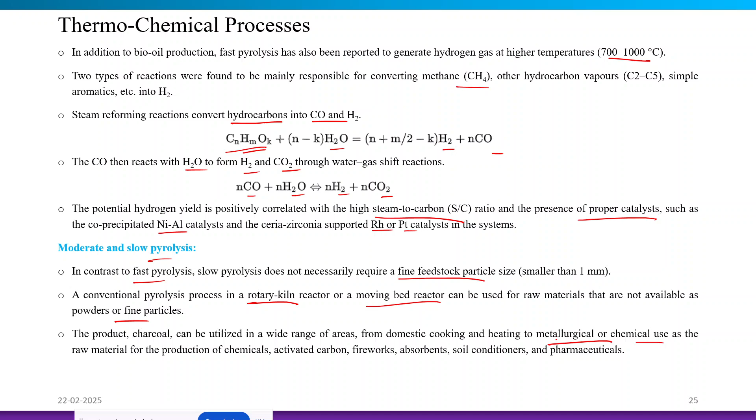The next process is gasification, which is also an important thermochemical conversion process. Biomass gasification converts the biomass into combustible gases like hydrogen, carbon monoxide, carbon dioxide, and methane with specific heating values in the presence of a partial oxygen supply. Typically, 35% of the oxygen demand for complete combustion is required. So we supply oxygen partially, a very low oxygen content, or suitable oxidants are used, like steam gasification or carbon dioxide.

When air or oxygen is employed, gasification is very similar to combustion, but it is considered a partial combustion process. Gasification is considered more environmentally friendly because of the lower emission of toxic gases into the atmosphere and the more versatile use of the solid byproducts of the gasification process. Gasification can be viewed as a very special form of pyrolysis taking place at a higher temperature to achieve a higher gas yield.

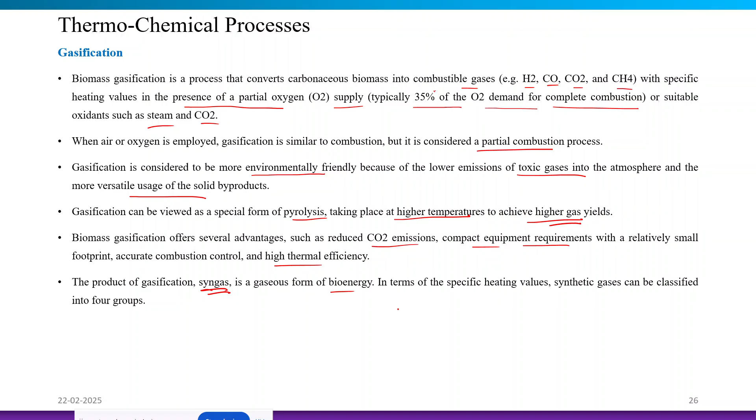The product of gasification, which is mostly syngas, is a gaseous form of bioenergy. In terms of specific heating values, synthetic gases can be classified into four groups that will be discussed in the next slide. Now, pyrolysis is the first stage of biomass gasification.

During this stage, the biomass feedstock is decomposed into tar and volatile hydrocarbon gases that contain certain quantities of hydrogen before the commencement of the gasification reactions. Then, when these volatile hydrocarbon gases are evolved in the pyrolysis in the first stage, thereafter a series of reactions takes place in the gasifier.

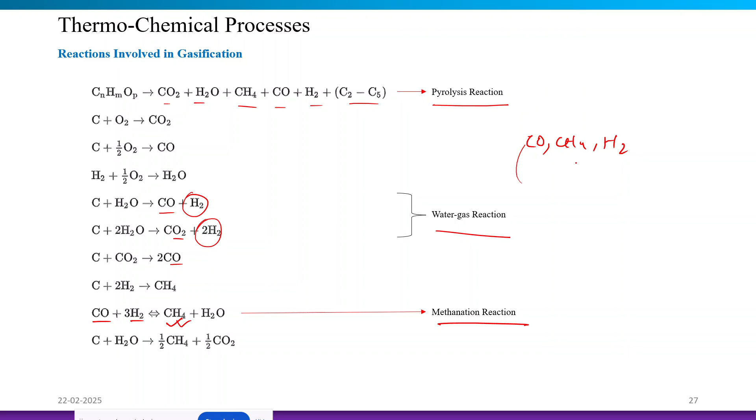So we are getting methane out of this methanation reaction, so as a product we are getting carbon monoxide, methane, and hydrogen. It is a combination of gases we are getting from the gasification process. So now we are going to discuss gasification versus combustion. What are the main differences, right?

So, first, gasification creates valuable and environment-friendly products from waste or very low energy value material, whereas combustion generates only heat, by means of destruction of the waste, right? The process type in gasification is thermal as well as chemical conversion with no or limited oxygen present. In combustion, we get complete combustion with excess oxygen.

While in gasification, the raw gas composition before gas cleanup has particulates, hydrogen, carbon monoxide, ammonia, and H2S. These are some impurities. Whereas in combustion, we are getting a lot of SOx and NOx in the outlet gas. After the gas cleanup, the syngas cleanup happens at atmospheric to high pressure conditions depending on the gasifier design.

Now this treated syngas can be used for various chemical generation, as well as for other fuel production or power production. We recover sulfur species in the fuel, as sulfur or in the form of sulfuric acid. So we are utilizing all of the impurities in the gasification product.

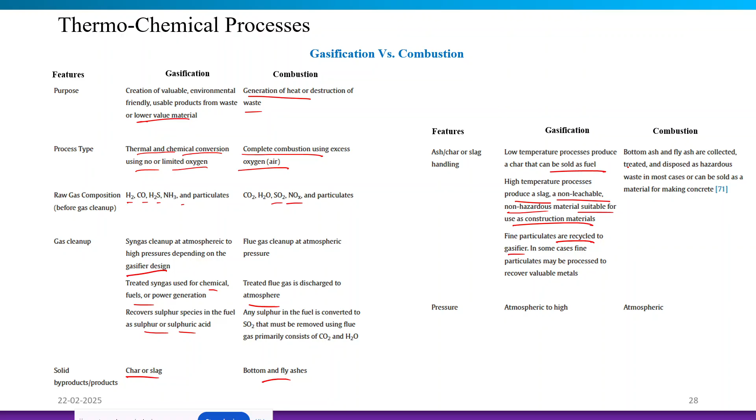High temperature processes produce slag, which is non-leachable, non-hazardous, and suitable for use as construction material. And the fine particulates generated by the gasification process can also be separated and recycled to the gasifier again. But in the combustion process, the bottom ash and fly ash are collected, treated, and disposed

as hazardous waste in most cases, or can be sold as a material for concrete making. But this utilization is limited compared to the gasification process. Another thing is pressure. Gasification happens at atmospheric to high pressure, but combustion happens at atmospheric pressure. This is an overview of the difference between gasification and combustion.

These sound very similar, but the main difference is the presence of oxygen. In combustion we have excess oxygen, while in gasification we have limited or no oxygen conditions. And the other difference is the product utilization.

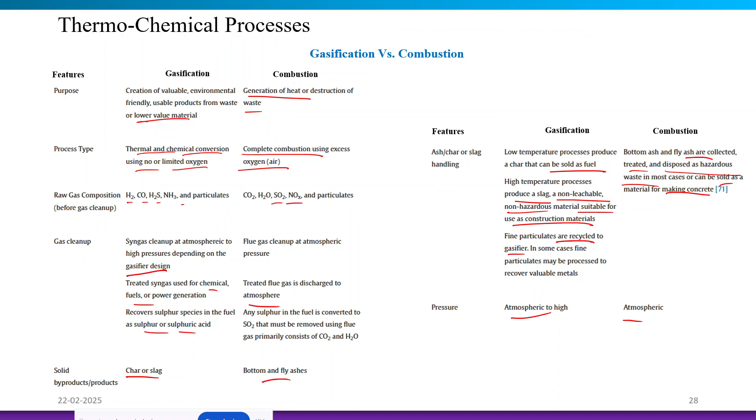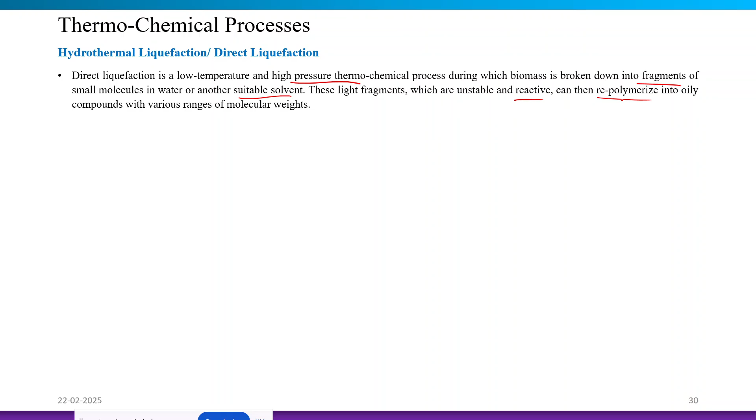Water can be used mostly because it is considered a green solvent and a green process can be maintained. These smaller fragments, which are unstable and reactive, can be repolymerized into oily compounds with various ranges of molecular weights. Direct liquefaction has similarity with pyrolysis in terms of the target product, that is the liquid product. Pyrolysis here means fast pyrolysis.

However, there are differences in terms of operational condition. Direct liquefaction requires a low reaction temperature but high pressure, because pyrolysis happens at a low pressure of 0.1 to 0.5 megapascal, whereas direct liquefaction happens at a high pressure of 5 to 20 megapascal.

Superior to pyrolysis, hydrothermal liquefaction produces better quality bio-oil, which contains various chemicals including vanillin, phenols, aldehydes, and various organic acids.

In addition, drying of the feedstock is not a necessary step for direct liquefaction, and we can use a lot of aquatic biomass in this process. In contrast, for the pyrolysis process, drying of the feedstock was a necessary step.

Lignocellulosic biomass materials are most widely used for bio-oil production through this direct liquefaction process. Since lignocellulosic materials are rich in hydroxyl groups, they can easily be converted into intermediates by the direct liquefaction process for the production of different biopolymers such as epoxy resin, polyurethane foams, and adhesives for plywoods, etc.

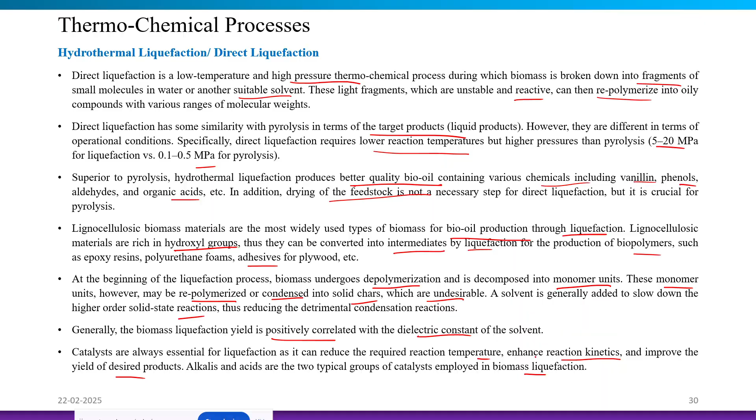So this is all for today's class. We have discussed the thermochemical conversion processes. In the next class, we will discuss the other microalgae conversion processes, algal conversion processes. So, is there any question as of now?